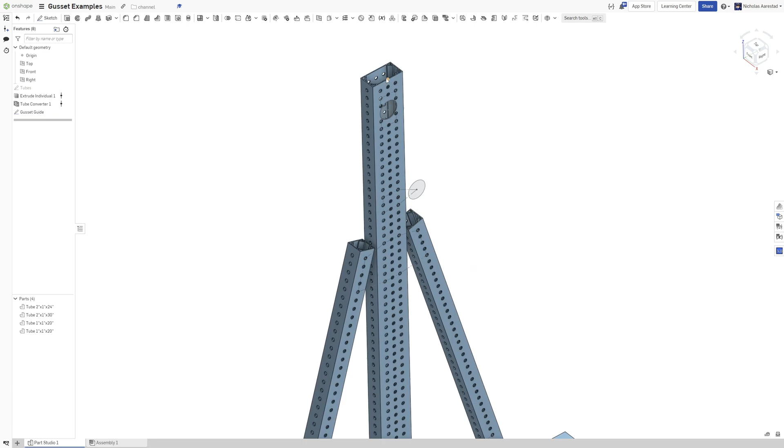A Rev Max tube, go check it out, good stuff. I like hole pattern tubes. I don't like CNCing tubes, or having my kids spend a bunch of time CNCing tubes. So really great stuff there.

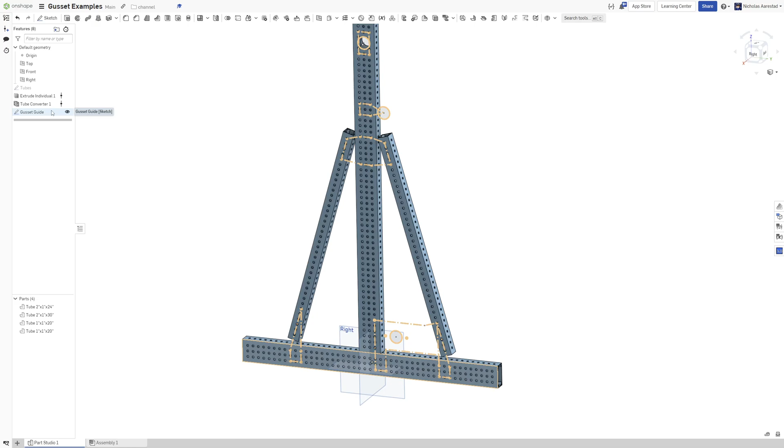I have some tubes here, and I've got a sketch here that's basically the first step for me to figuring out what gussets I'm going to make. Some of these I guess technically aren't gussets, but we'll make them anyways because they're useful to demonstrate some of the things along the way.

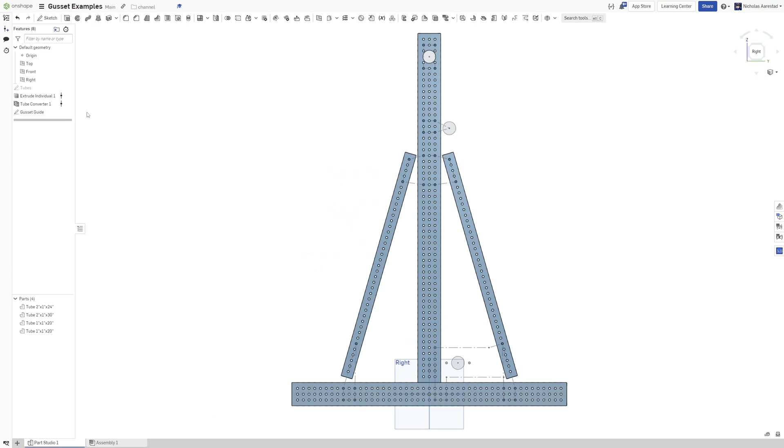If I highlight that sketch, these are my gusset guides, the places that I'm going to want gussets. I like to mark this out because I like to think through things before I go and do them or make them.

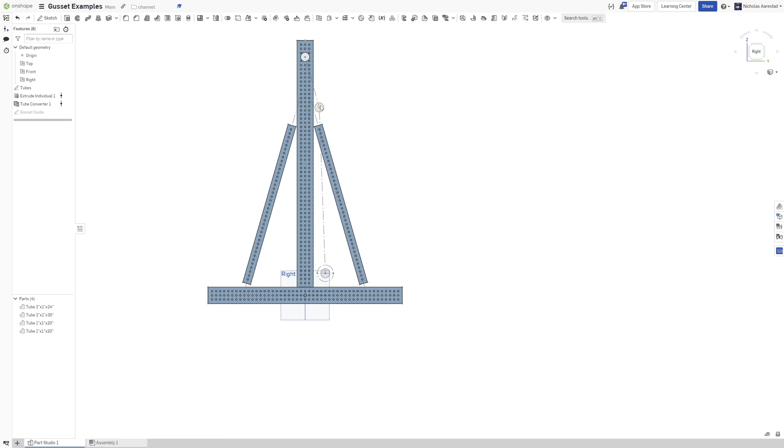In this case, this stuff is patterned from this guy, which is what we would call our primary sketch, and it kind of defines some of the core geometry here. So we would have like a big arm up here going to another gusset, going to something down here.

Anyways, gussets. So we get in here, we're going to start making a gusset. For this guy up here, this is what I would call a pretty simple gusset.

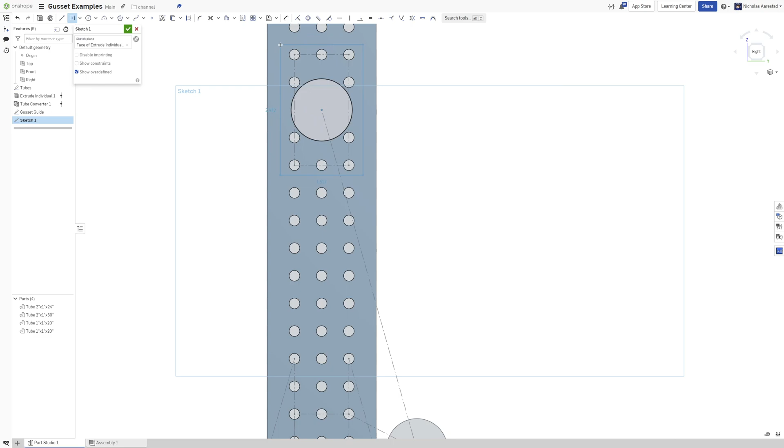So we're just going to take this circle, and we want to make a bracket here, so we're going to make a rectangular guy. This will be a pretty good intro to some of my basic gusset things. I don't have Carnac open, so we're going to open that up so you guys can actually see what I'm doing.

So, 23 - right, and this is where we kind of start introducing some of my key things. Actually, that's 0.02.

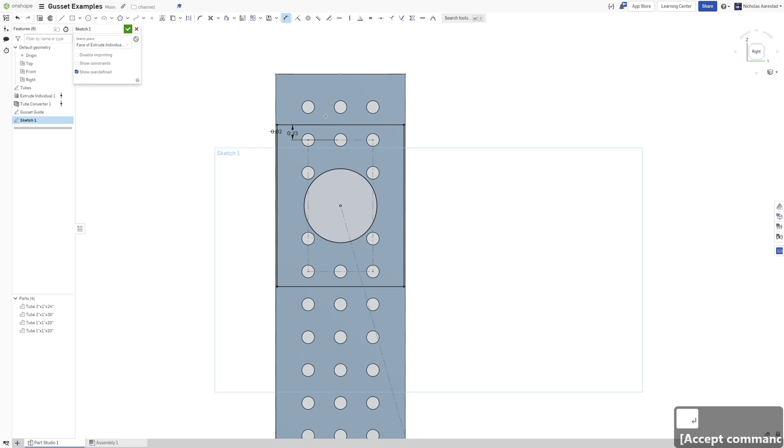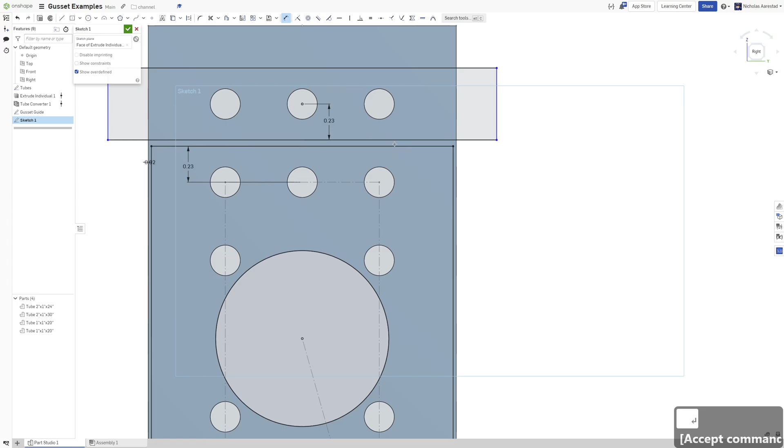One of the things that I always do is I like to structure gussets so that you can have another gusset next to them. What that means is, when we have this guy - obviously we're not going to put a gusset on the top of this thing - but if I wanted another gusset here, if I have it at 0.23 like this, then I can safely just make another gusset that attaches there at 0.02, and not have to worry about it interfering with this. Which is great because in FRC, you oftentimes find yourself adding things to stuff, so you want to be able to safely just add another gusset right next to the other thing.

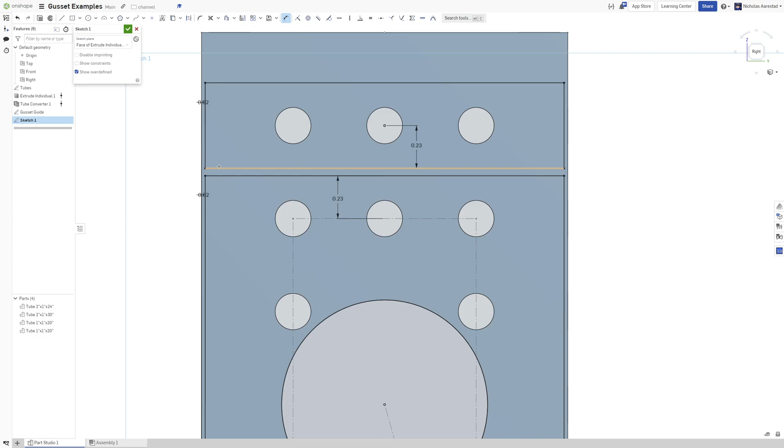Whenever you want to do that - so in doing this little offset here, this 0.23 offset, it means that even if you're a little bit off on assembly or even a little bit off on your manufacturing, you're going to be able to safely just throw in this extra gusset here. So that's why we do that.

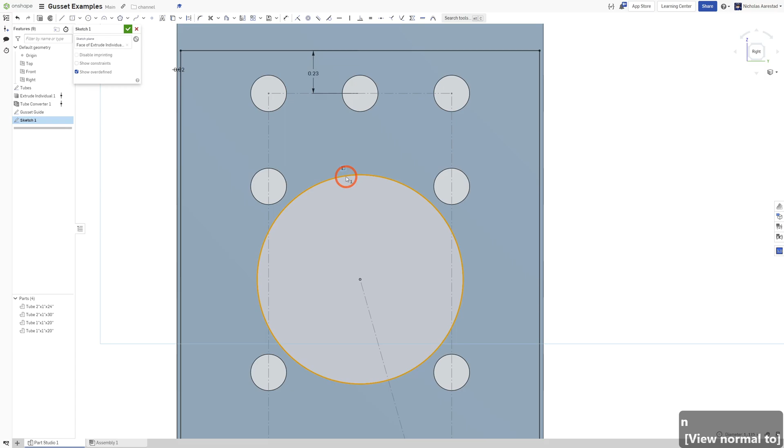We're going to delete this stuff before we do that. So we've taken this, this guy, and then we're going to want our holes. In this case, I'm just going to take these holes using the use tool, good stuff. Those are the holes that we're going to make, and I'll make this gusset here.

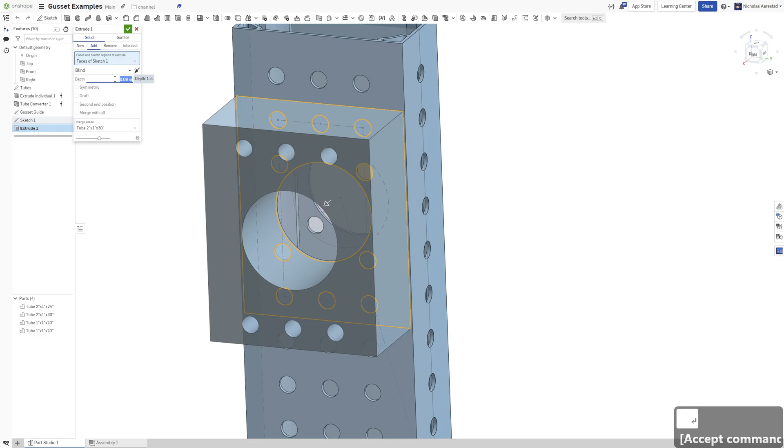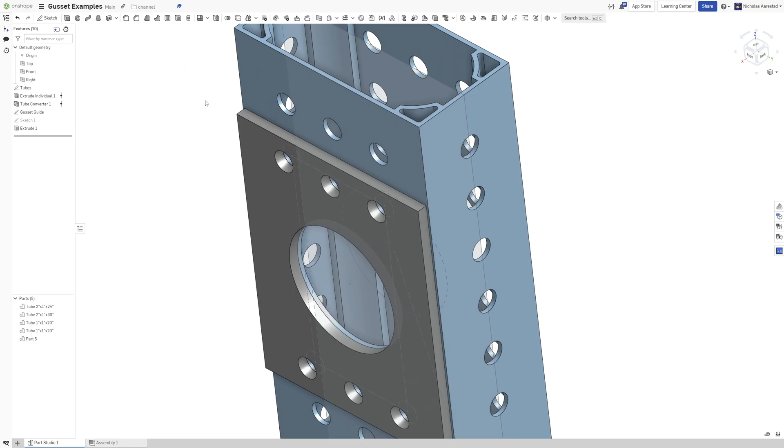I typically use, 2220 typically uses 0.09 inch gussets. They're plenty strong. We use 6061, 0.09 inch gussets. You can use 1/8 inch, sometimes it's nice for math, but I just find it useful, so I just prefer those.

So we have a gusset here, but I don't like sharp edges, so we're going to go in here. One of the things you might notice is that I'm going to use a parallel select there. You can also use, there's a great tool that when we get into talking about Julia's gusset feature script, we can look at.

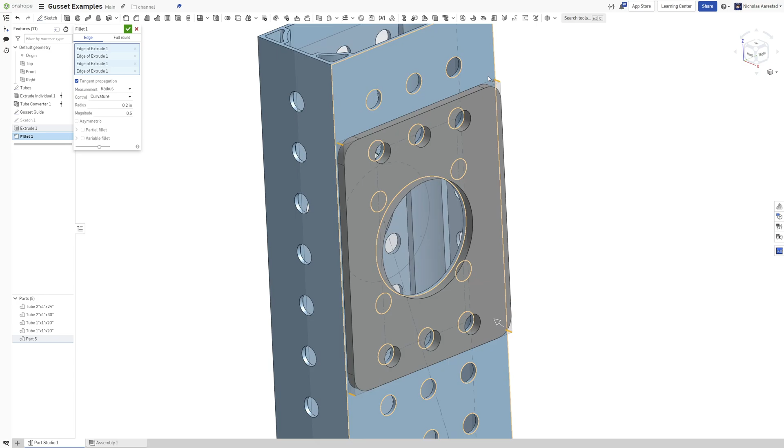So we've got this, we've got a rounded little gusset. This is more of just like a kind of a spacer plate. You might want to reinforce around this hole because this is thin metal, because the rev tube is really thin or something like that. But this is the very simplest kind of plate that you might make.

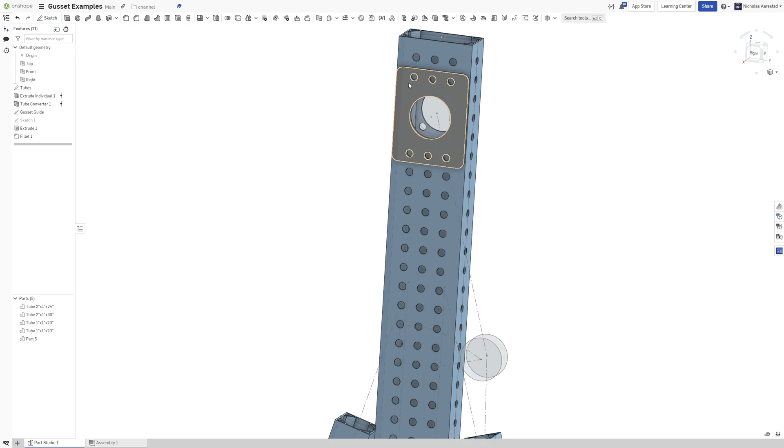Now let's go on to some other ones, and hopefully the rest of these will be a little bit faster. Let's hide this tubes one because it's getting in my way. One of the things you'll also notice me doing is I tend to use a lot of this style of just making a center point rectangle and then dimensioning stuff.

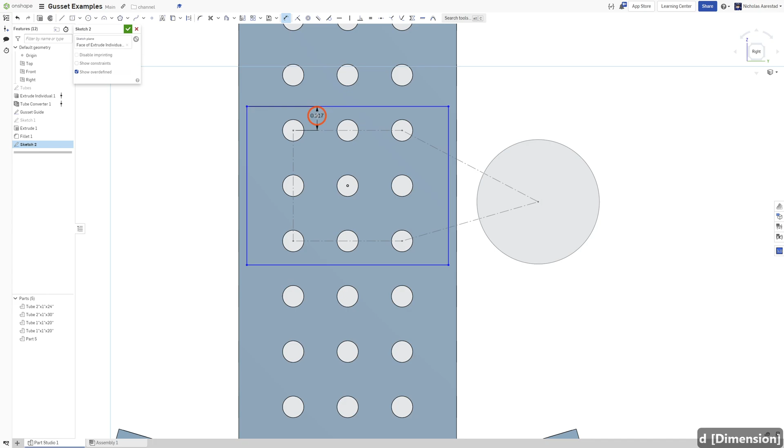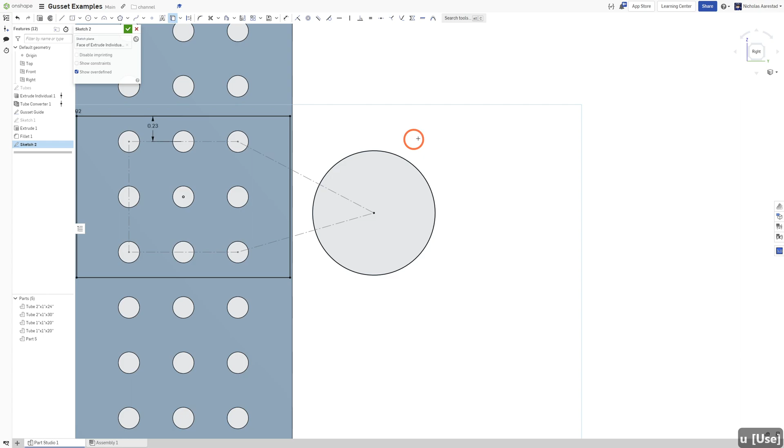So one of the things that makes that easier is looking at this and being like, okay, I just want -- I like odd patterned holes, because then you have a hole in the center that you can snap to that's really easy. So then we got this guy out here. This will be for the bearing, and we'll use an offset here to go kind of around it.

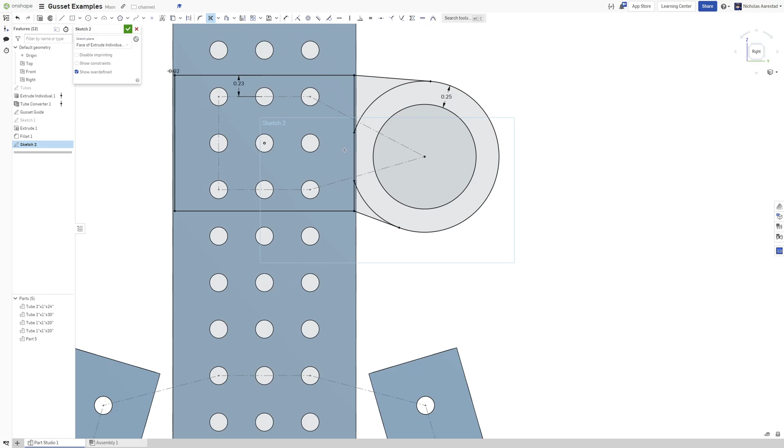And then no need to make this too complicated. You can just kind of drag this out and make it tangent here. And then one of the things that I'll also typically do in a case like this is we have this little overlap here, and I'll just use this trim tool and get rid of that little bit of overlap.

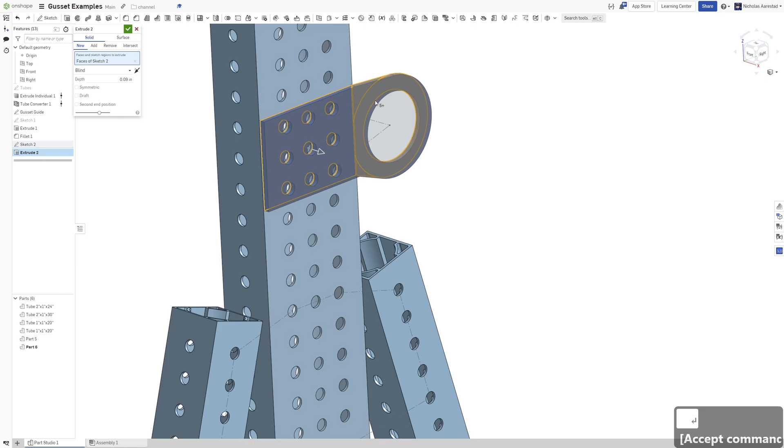And that'll just let it all extrude. And then we have to use these guys, and that is that, so we'll take that out. Again, 0.09 -- we've opened a new one so that it's not adding it to that. And then we create a parallel edges selection, and there we are. We got that gusset -- that gusset's really easy.

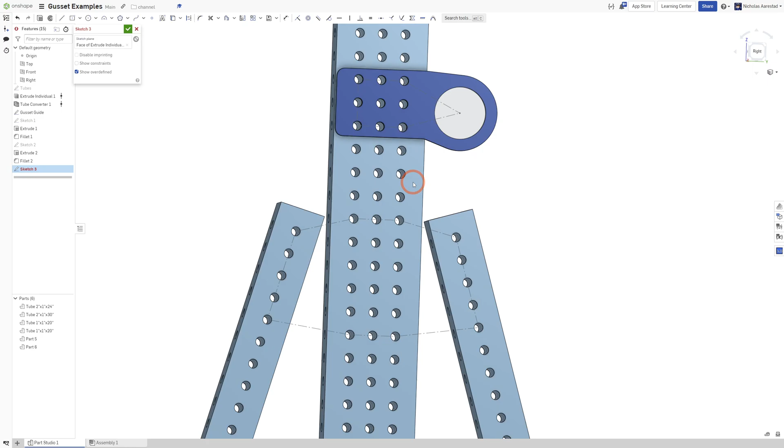We'll get down to here. So this kind of top gusset is going to be a little bit different, and the main way that it's going to be different is this will be one that we take advantage of mirrors on. So we're going to do some of the same things, and this is also a good intro to how I do angled stuff like this.

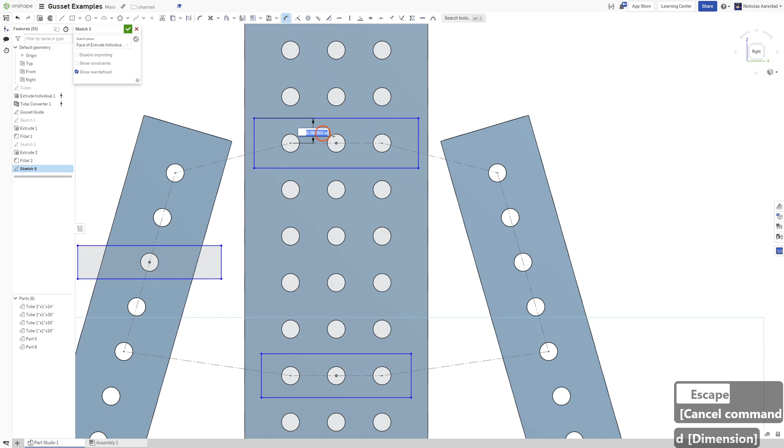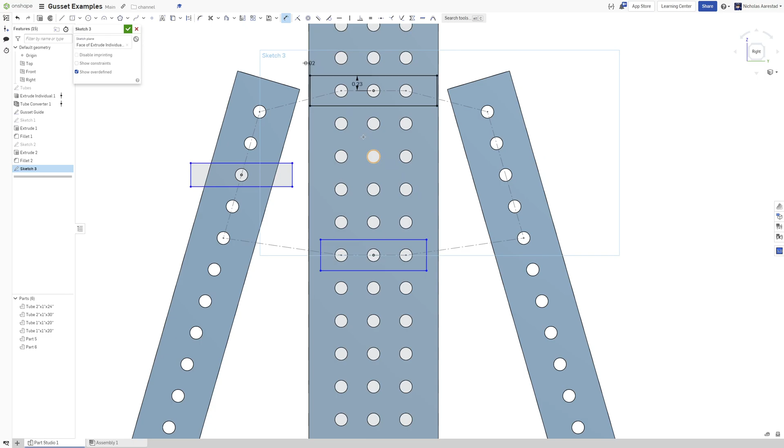So we're going to drag out our rectangles and then start doing some of those constraints -- 0.23, 0.02 from the edge. The edge constraint here is important -- that's basically saving you from if you have to make a perpendicular gusset, you don't want your gusset to extend off the edge. It's less important in this case because it's not going to actually matter that much.

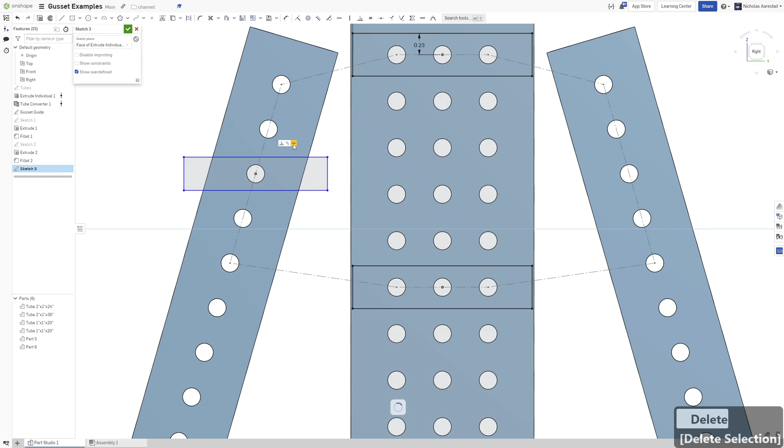But since this guy's basically the same thing, we can just make these all equal, and that'll constrain that. This is kind of a fun one. So in this case, what I'm going to do is actually just break this horizontal constraint, and then I'm going to make this parallel. That'll make this really nice and easy.

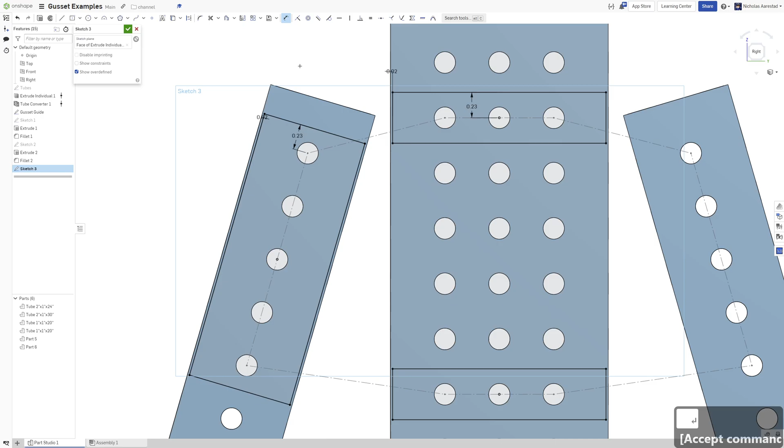0.23, 0.02. And if this feels a little bit repetitive, it's because it is. I wanted to show you a few different ways that this gets used, that we would do something like this. And then I'll show you a few other ways that can sometimes save you time and sometimes not. We're just going to grab all of these -- in this case, you can also kind of do a selection.

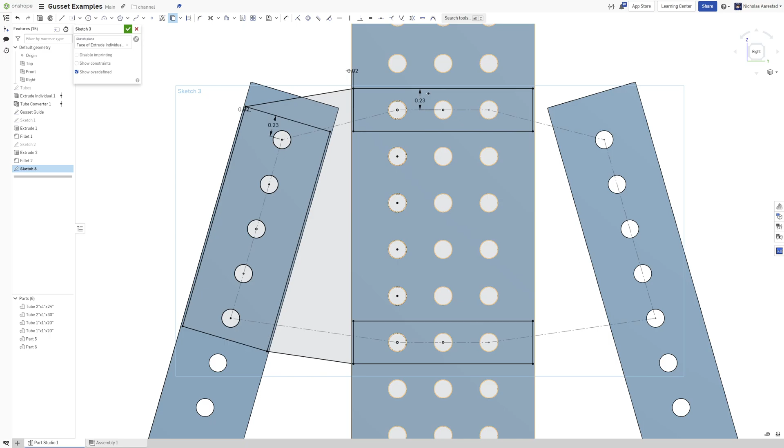This isn't necessarily ideal in some of these cases because sometimes you can run into situations where it starts duplicating things or stuff like that. But that's all right, and then we're just going to mirror all that over to the other side.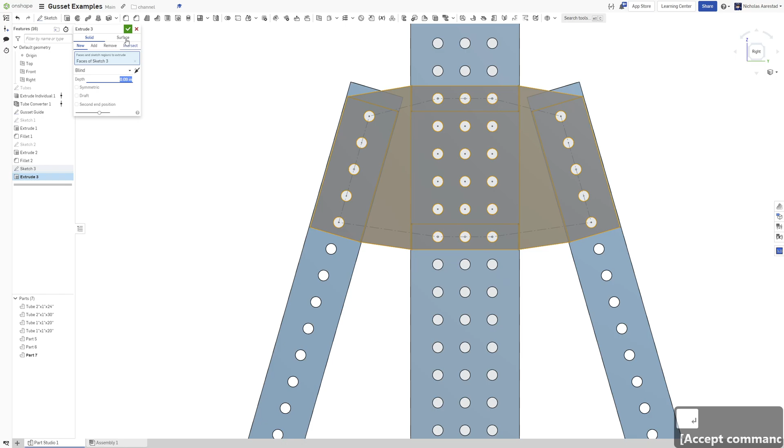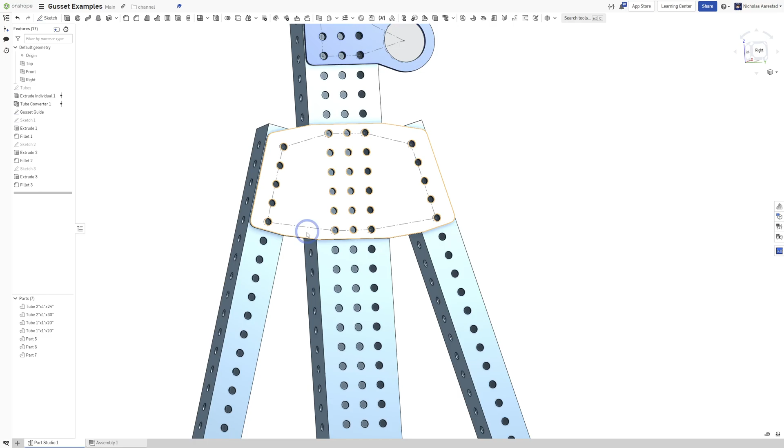Extrude that, 0.09, new, and then add our constraints. And this guy, there we go, parallel constraints, right? We're all good. You'll notice that by doing it this way, we've preserved that on all of these different axes, so we could add a gusset here, or here, or here, or here. All of those options are still open to us operating like this.

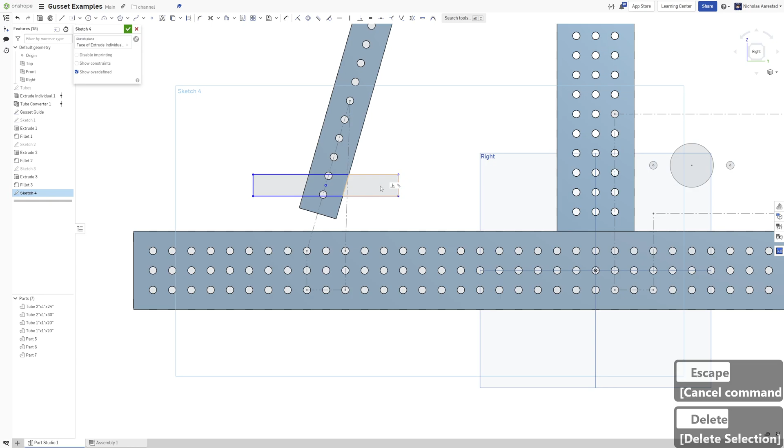Alright, and then we're going to go down here and do one more. This one's going to be a little bit different, but it's a similar thing, where we delete this horizontal constraint and then make things parallel. We go 0.02 from the edge, and then we've got that one.

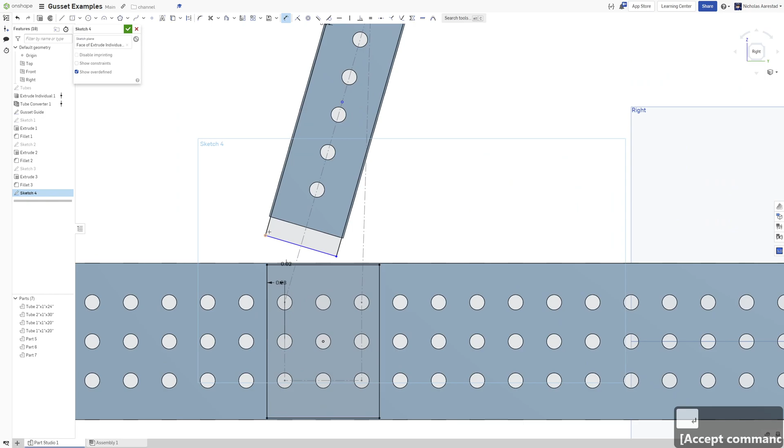And then we're going to do the same thing down here, from the edge, 0.23. For this one, I'm going to do a little bit of a thing like this, where I make this vertical, so I make sure those are vertical, and that'll make sure that's a straight edge. And we're going to have to do this guy, 0.23.

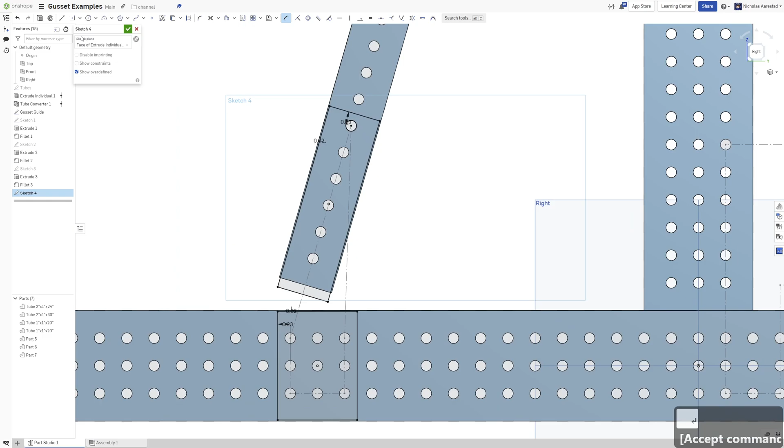And then we'll draw up our lines like this. Okay, and then we can use all of our things like this on something like this flat one, where we can get a bunch of nice things. You don't need to, you can just do that.

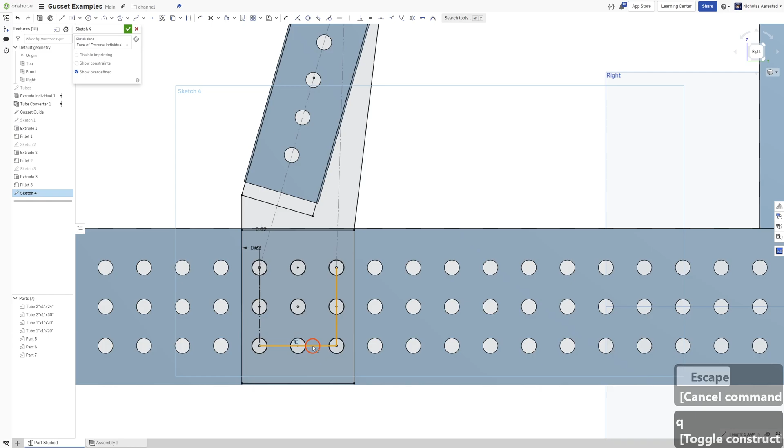On this one, if we do that, we do a use and just drag it out around these things, you'll grab these side ones, and you typically don't want those. So on this one, you'll typically just grab, like on one of these guys, you'll just grab these holes.

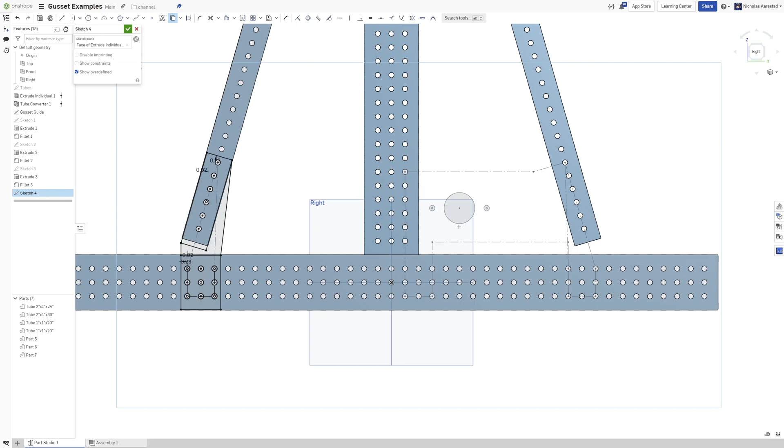And then I'm going to combine these two because I want to reuse this geometry, since I don't feel like making you sit through making it again. So we're going to mirror that over to here. This is another good case for why we make sure we have as much symmetry as possible in a CAD file.

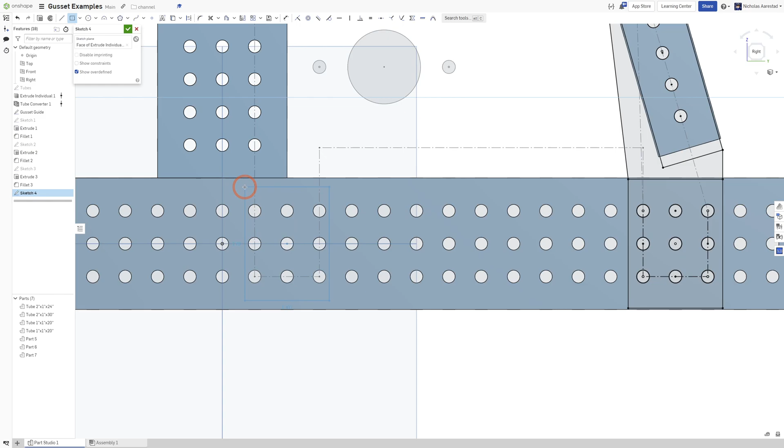And then we can do a few cheats. So make this horizontal to make that tab out. Because this is both 0.3, we can also make this width the same. And then we can do a few things up here, like something like this.

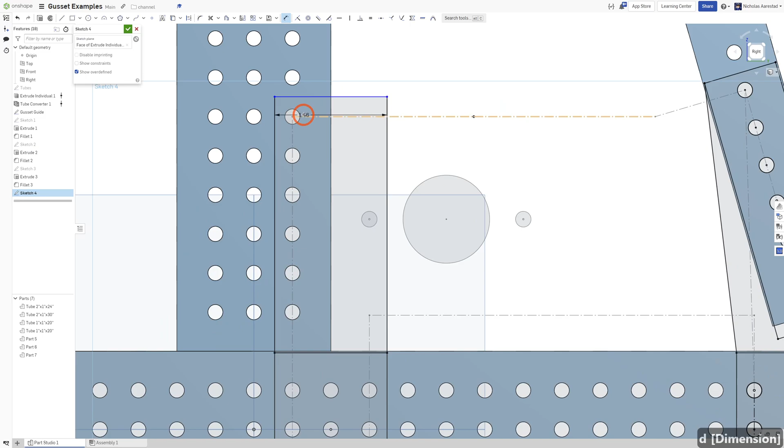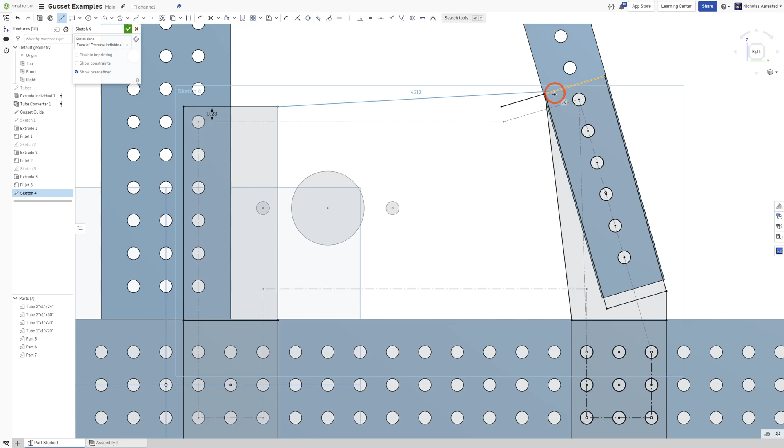So that'll be there. This will be 0.23 here. And then we'll do a kind of a fun little thing here. So with this, what I can do is I can make sure that this line is the exact right length by doing that. So, and then that will be this guy, which kind of preserves all of those different little angles.

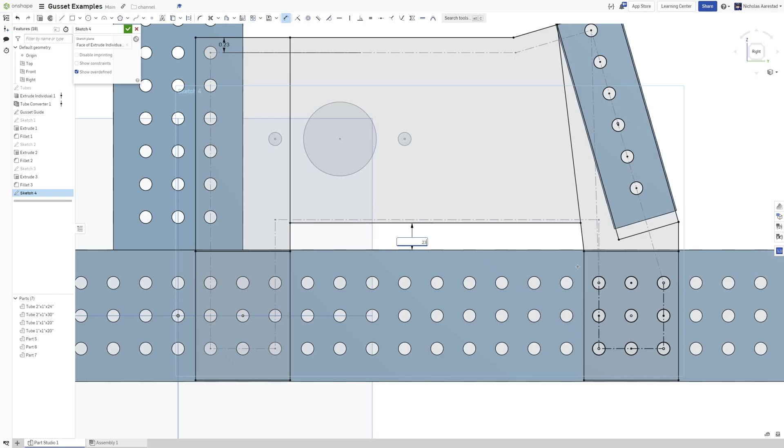And then this one can just be a little bit simpler. We just do this, give it a distance. We typically use 1/8 inch polycarb for belly pan stuff, so I'll give it like a 0.23 off of there to leave a little bit of extra clearance.

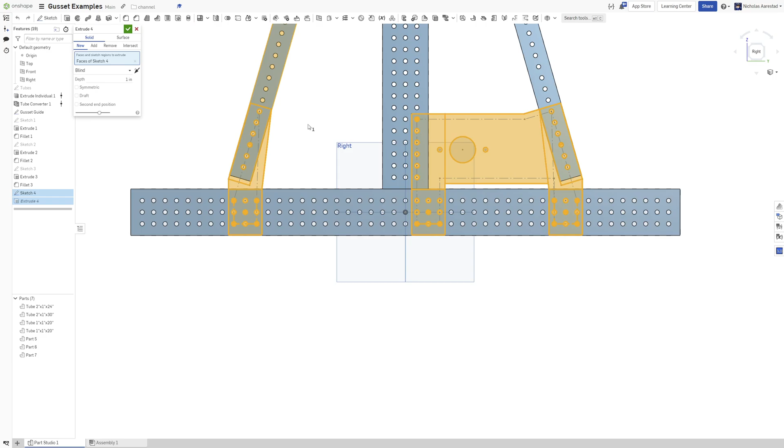Alright, and then we just again use all these guys. And then, because we want these guys, want the bearing holes, we'll use those as well. And that's how I'll do gussets whenever I'm making them manually.

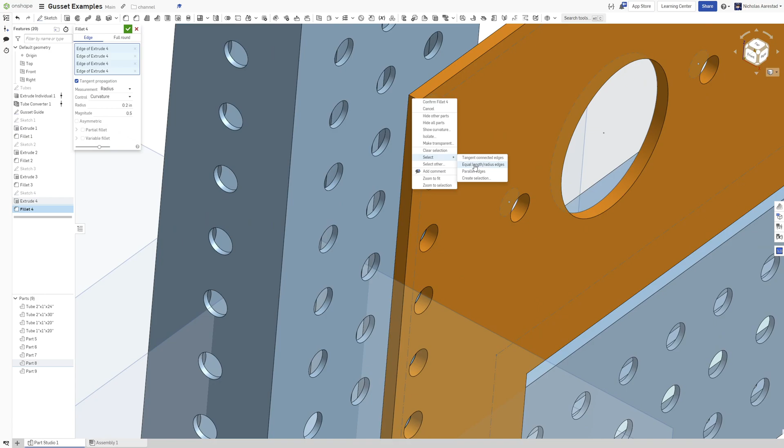Okay, so we do this. Let's do our selection thing again. Parallel edges on this guy. Good stuff. Select parallel edges on this guy. Also good stuff.

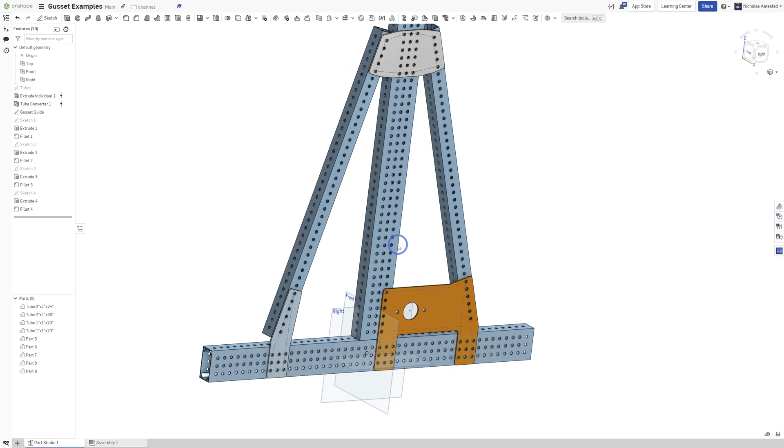Alright, and then we have all of those custom gussets, and that didn't take too long, right? That took like, whatever, 10 minutes to put together all of these gussets. So manual gussets shouldn't be a huge time sink. That being said, sometimes you want to go faster, and so for that we have Julia's Featurescripts, which can replace some of these but not others.

So I'll typically use one of two of these if I'm going to use Julia's Featurescripts. I'll use this convex one or I'll use this select lines one. So I'll show you what convex looks like first.

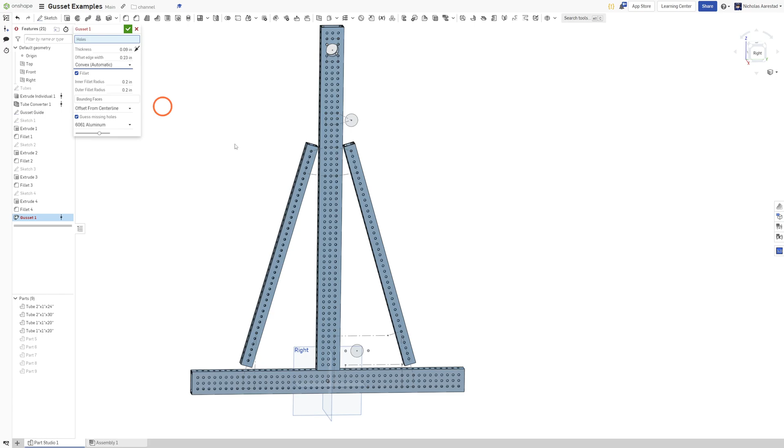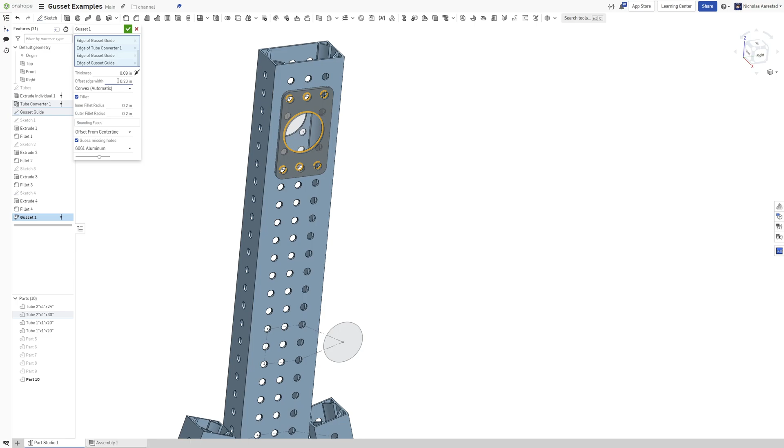So convex will look something like this. We select all of the holes, and then we might select like a bearing hole here, and that'll give us a nice gusset there. You notice I already have all this stuff set to offset 0.23 and all that fun stuff. That being said, if you look at this, it's not quite all the way up to the edge. Oftentimes that doesn't matter, but if it does matter, we can use move face on it to just make that a little bit bigger.

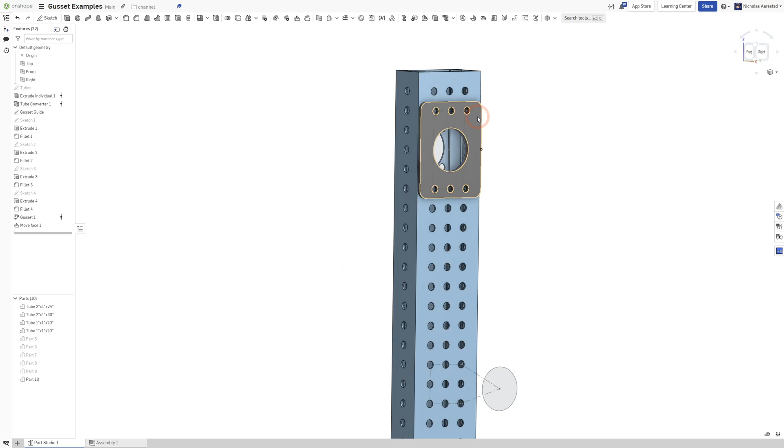So that's one thing. Unfortunately, this starts running into limitations when we want something like this. So I can do basically those same things.

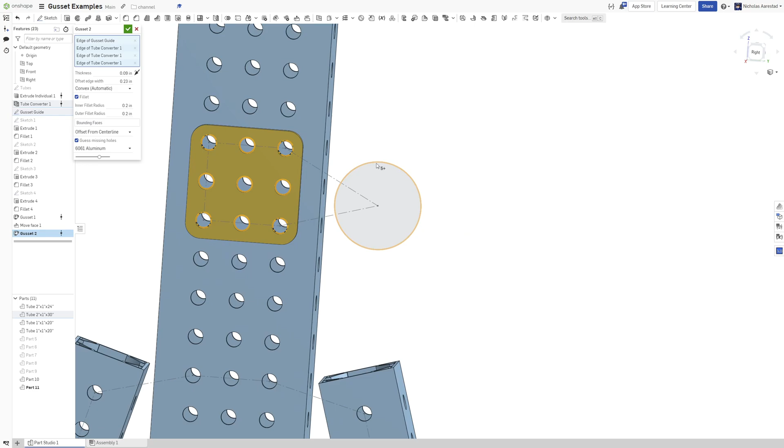I can grab all my things here, and sometimes it'll guess the holes, but not always. Unfortunately, that's not going to work out too well. The Gusset feature script is just not designed to do that.

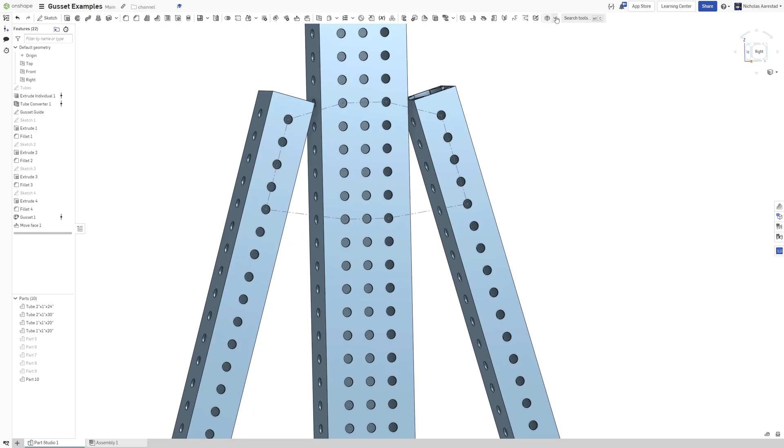So something like this, you're probably going to need to do manually. Something like this, though, is perfect for it. This kind of thing is perfect for it. We can just start grabbing.

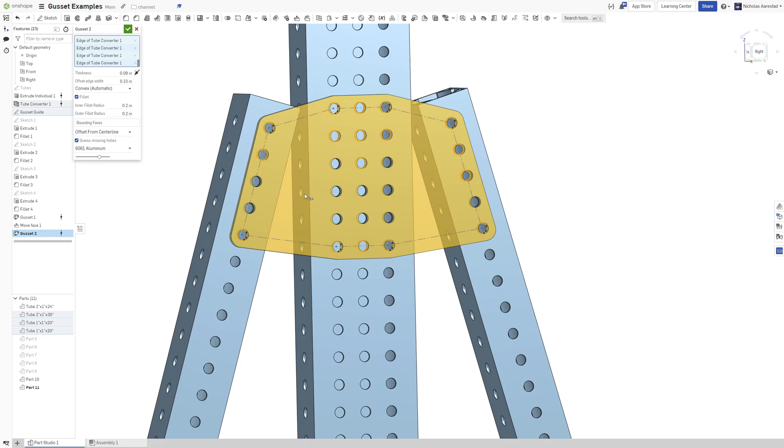Yeah, so we can grab all of our edges. And you'll notice it's kind of just drawing a line around the outside part of this, which may or may not be desirable to you. So sometimes you have to do a little bit of working with it. You can see it's starting to guess the holes for some of these, which is great. So for something like this is great.

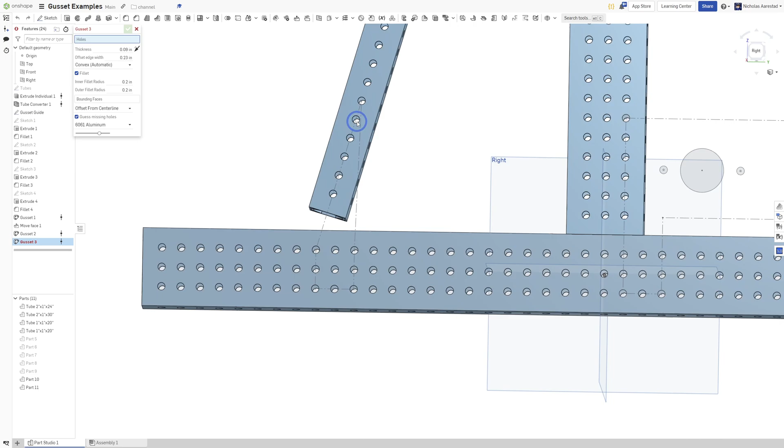Again, if we don't care about going all the way to the edge, which a lot of people don't. One of the other issues we can run into with this, though, is some of these gussets down here. So on this corner one, we're going to run into the long edge problem, as I'd probably call it, like this. I can't preserve that 0.23 inch thing on a sharp corner like this, and that's something I often really care about.

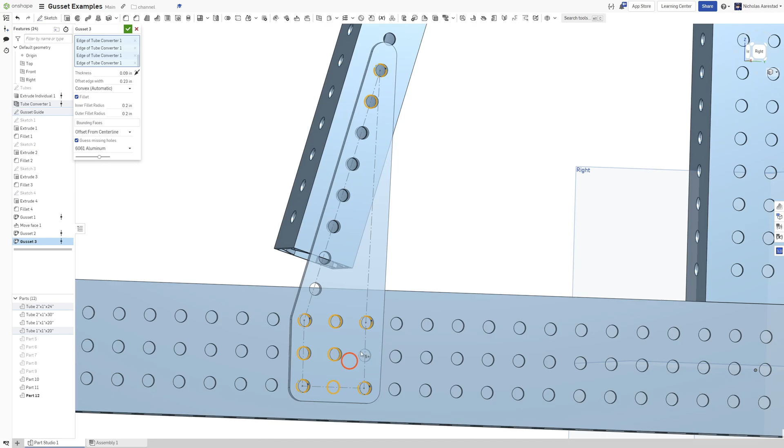So we can do a bunch of stuff like that. Stuff like this extra hole here doesn't really matter that much because it's really easy to get rid of that, and I'll show you how to do that right now. We just delete face on these holes, and now we don't have those extra holes.

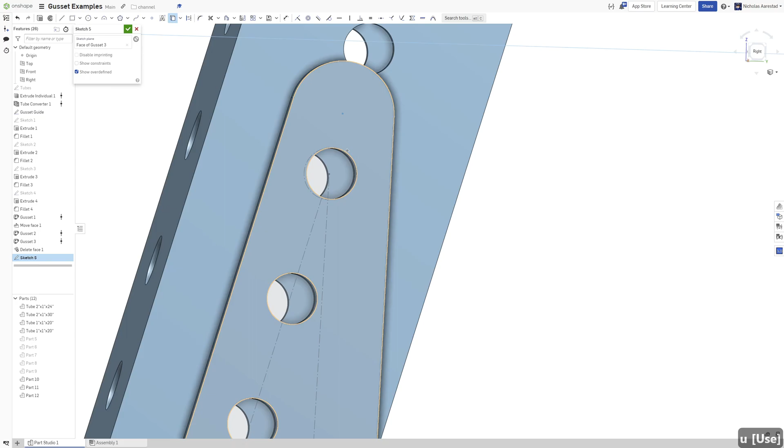Something like this is a little bit more complicated to fix. We want to do something like this - take this out and make it diameter there. Use this, and then we can just extrude, remove that through all. And that's how we can preserve that if we want to do that with this.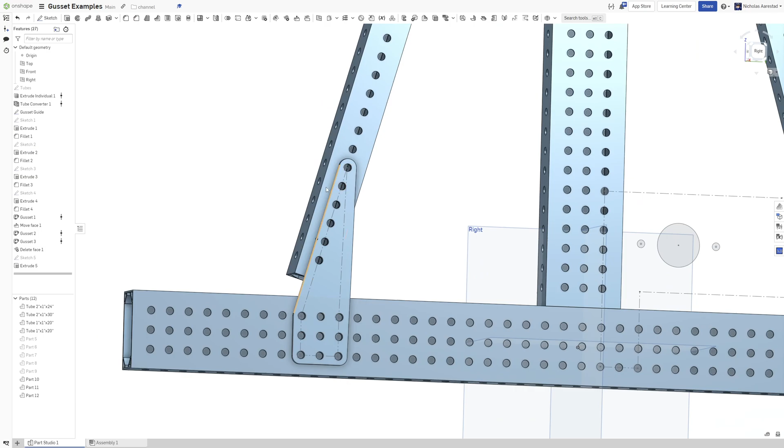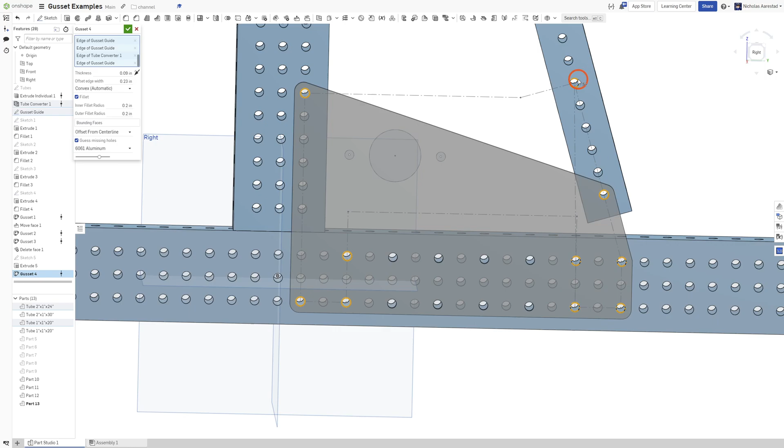And then something like this is also a limit to the auto convex one. Because you can kind of see, this one doesn't really let you just say that I don't want this zone easily, and also getting this kind of angle thing up here and all that fun stuff. So I'm not going to totally go through making this one, just because I think you can see where that might have some problems. Now you can sometimes use like these bounding faces or something like that to do that, but that can be a little bit complicated, and there's a way easier way to do that.

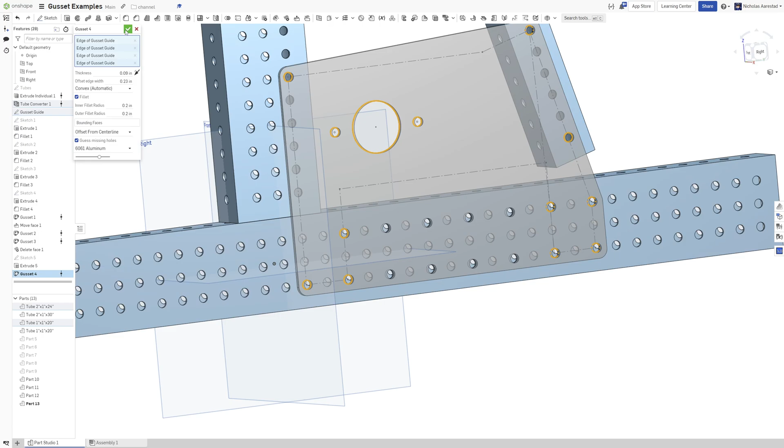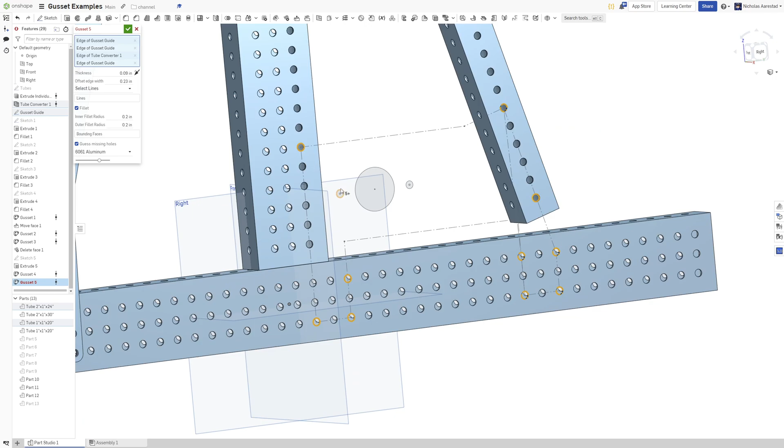Which I'm going to show you now, and that is going to be using the line gussets way of doing this, which is select lines, and you still have to select the holes, right, all the fun stuff. We'll grab a few of those. Okay, grab these guys, and then I can start grabbing some lines. So the lines, this one basically is going to follow those lines.

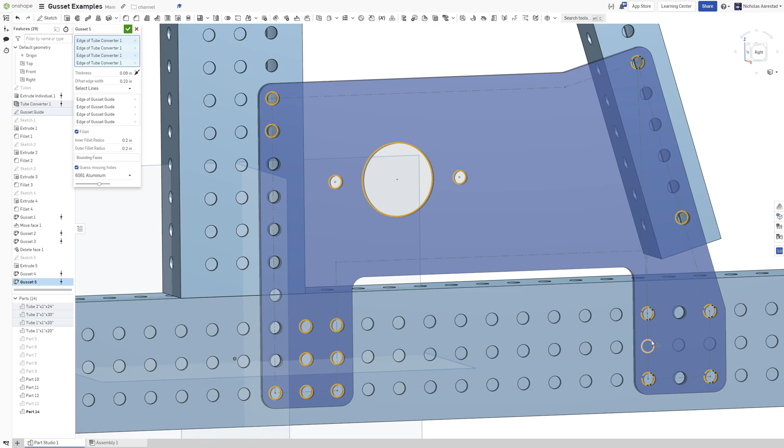So it's really easy to get kind of this kind of deal where you want it to be a little bit offset on one of the faces or something. That's very easy to add with this. So we're just gonna get all these guys good. And that's a pretty close approximation of what my manual gusset looked like, and it took us a little bit less time.

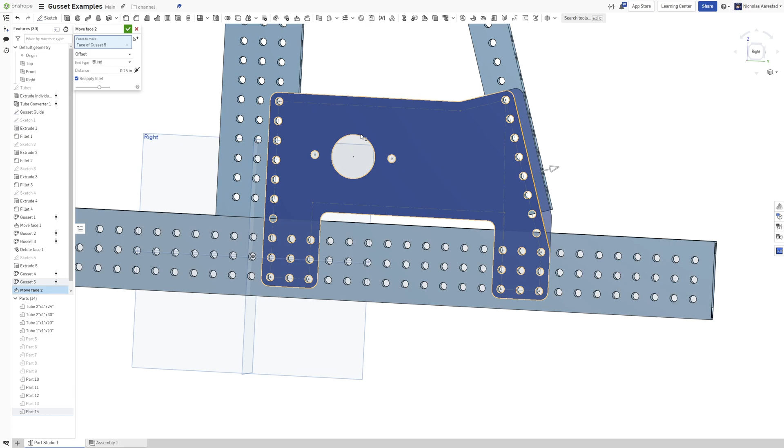And then similarly, we can make some of those adjustments if we want to. So like this guy can go out a little bit if we want it to do that. We can delete those, some of those extra holes, that kind of thing.

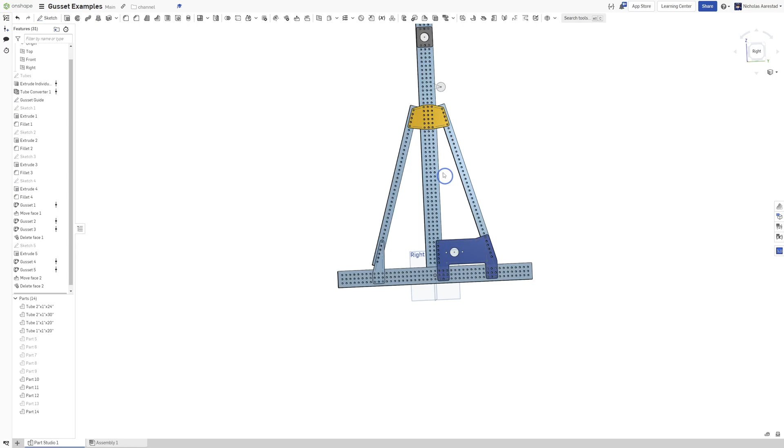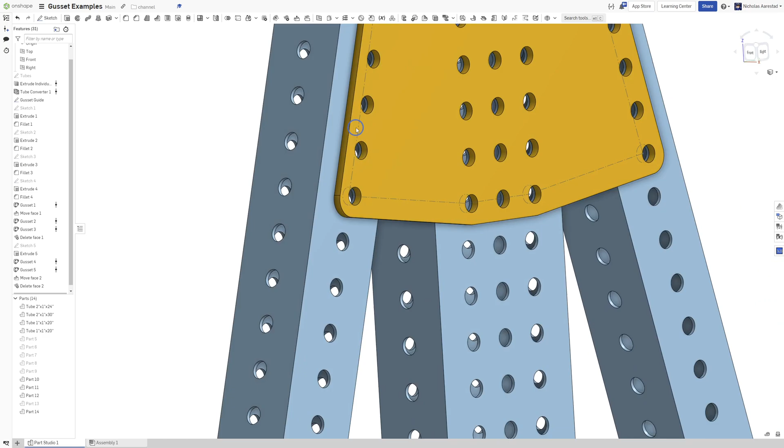All right, so I'm not going to cover the other one because I don't really use it that much. Somebody probably really wants me to do that, but that is hopefully a pretty good introduction to some of the tools that you would use to make gussets in FRC. I use all these tools, and I try to teach my kids to use them. And I hope you can understand some of the pitfalls, especially like blocking off holes and stuff like that, and why you'd want to avoid doing that.